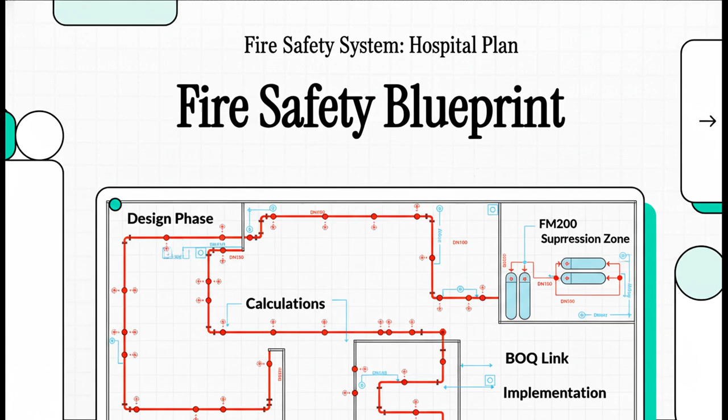All right, let's get into it. Today, we're taking this, a hospital fire safety drawing, a single, really complex document, and we're going to break down exactly how it goes from lines on a page to a real life-saving system. This plan, right here, is our single source of truth, and we're going to follow its journey from concept all the way to reality. So, here's the game plan for today.

First, we'll learn to read the language of the design. Then, we'll translate all those symbols into an actual list of materials. After that, we'll map out how it all gets built, step by step. Then, we'll cover how we make sure it's all done right, and finally, how we prove that the whole thing actually works. Let's get started.

First things first, we've got to understand what we're even looking at. This part is all about reading the drawing, identifying the core systems and the rules that dictate how they all fit together. Okay, so this plan is really showing us three interconnected systems working in harmony. You've got your firefighting system, that's the main network of red water pipes and sprinklers. Then you have fire suppression, which uses a special gas, FM200, to protect really critical areas like server rooms where water would cause a ton of damage.

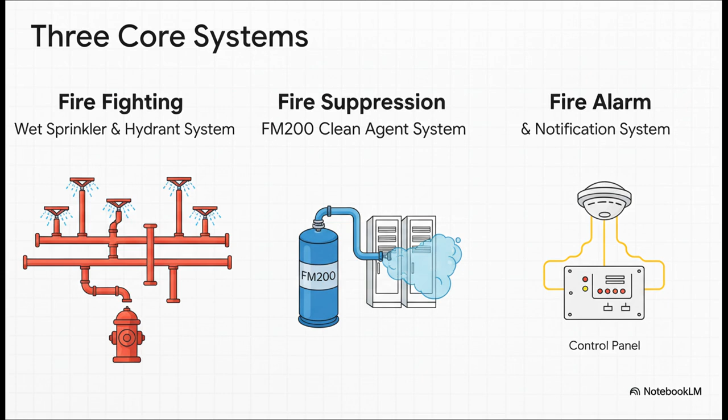And tying it all together is the fire alarm system. Think of it as the brains of the operation, the nervous system that detects a fire and tells everything else what to do. Now, this is absolutely crucial. These codes you see here, they're not just suggestions. These NFPA standards are the official rulebook, recognized worldwide. Things like NFPA 13 for sprinklers or NFPA 72 for alarms. Following these to the letter is what guarantees the system will work when you need it most, and it's what makes it legally compliant.

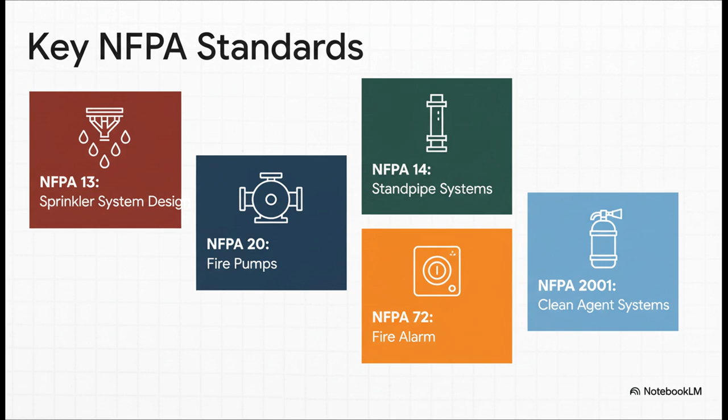So how do we know there's actually enough water with enough pressure to put out a fire? Well, that's where something called hydraulic calculations comes in. It's the core engineering that underpins the entire design. Engineers figure out the worst-case scenario, the area that needs to be covered, the amount of water needed per square foot, and that tells them exactly how big the pipes and how powerful the pumps have to be.

Okay, we understand the theory. We can read the map. Now, we have to turn all those lines and symbols into a real-world shopping list. This next phase is all about bridging that gap from the design on paper to the actual materials, the logistics, and of course, the cost. So how do you even start? It's actually pretty simple. You take it one piece at a time.

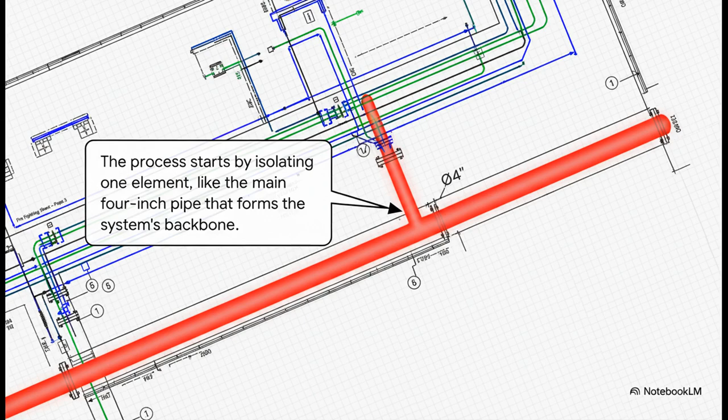Let's look at this main red line right here. The drawing tells us it's a 4-inch diameter pipe. This is a main loop, and it's basically the backbone of the entire sprinkler system. And there it is, the magic of translation. By simply measuring that line on the drawing and applying the correct scale, we figure out that we need somewhere between 120 and 150 meters of that specific 4-inch pipe. A line on paper just became a real quantity.

And then you just rinse and repeat. You do that exact same process for every single pipe on this drawing. From the 3-inch submains to the smaller 2-inch branches, all the way down to the tiny 1-inch pipes that drop down to the individual sprinkler heads. You do this enough and you get your complete piping bill of quantities, or what everyone calls a BOQ.

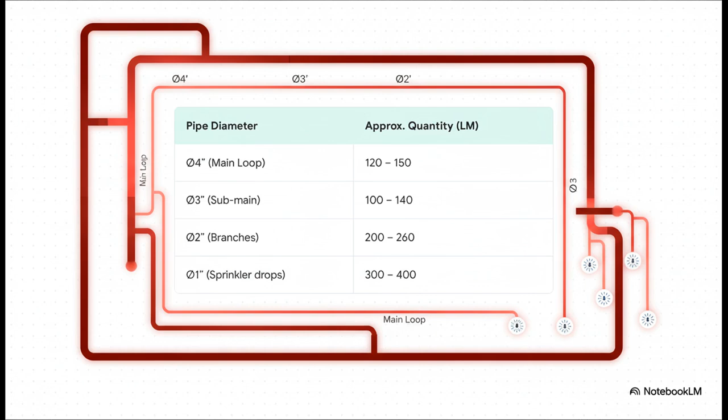Of course, it's not just pipes, right? You do this for literally every single component. The drawing tells us we need around 300 sprinkler heads, maybe 15 hose reels. We also have to count up all the fire alarm parts. We're talking over 200 smoke detectors here, and all the pieces for those 4 specialized FM200 rooms.

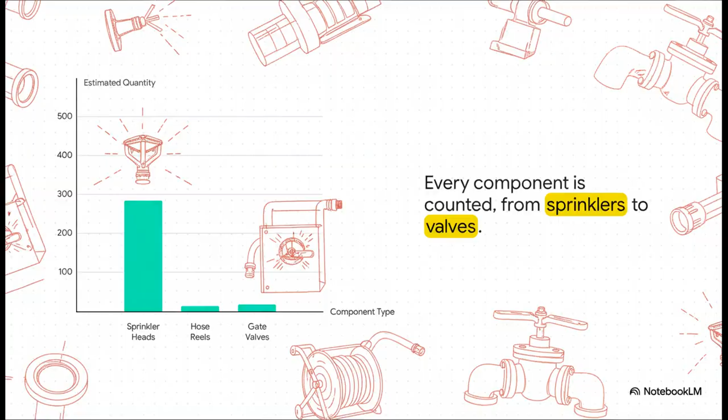Every single nut and bolt gets counted before a single order is placed. So, we know what we're building, and we know how much stuff we need to buy. Now we get to the really practical part, the how-to. What's the right order to actually install everything on site? Because believe me, the sequence matters a lot.

You see, you can't just start anywhere. There's a logic to it. You have to start with the main infrastructure, the big pipes. That's the skeleton of the system. Once that's in, you can start layering in the smaller components, like sprinkler heads, then the fire alarm devices, and you finish with the highly specialized FM200 gas systems.

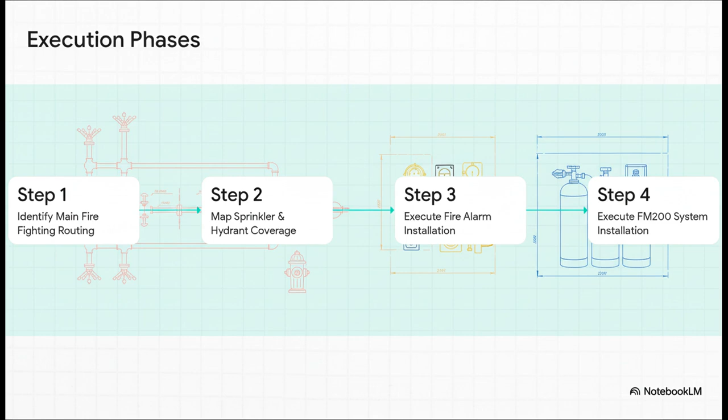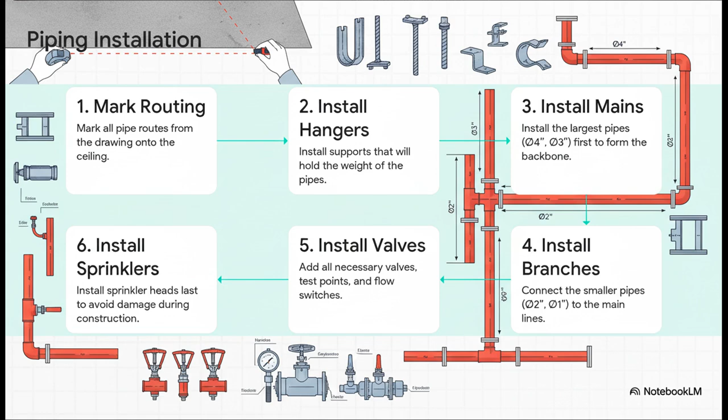Let's zoom in on just the piping for a second. Even that has a very specific order. First, you literally mark the routes from the drawing onto the ceiling. Then you install all the hangers that will hold the weight of the pipes. Only then do you start lifting and connecting the pipes themselves, and you always work from the biggest main pipes down to the smallest sprinkler drops. It's all about building a strong, stable foundation.

Okay, the system is starting to take shape, but is it being built correctly? And are they using the right materials? That's what this next part is all about, sourcing the parts and then checking the work. You know, having a rock-solid procurement plan is so important. You can't just go buy any old smoke detector off the shelf. Every single item, from the pipes to the special fire-rated cables for the alarm system to the FM200 gas cylinders, has to be formally submitted and approved to make sure it meets the project specifications and those all-important NFPA standards.

And this right here shows the constant back and forth between doing the work and checking the work. For every single action the installation team takes, there is a quality check that follows. They install pipes, an inspector comes and verifies the hanger spacing is correct. They finish welding, the system gets filled with water and pressure tested to make sure there are zero leaks. For those FM200 rooms, they even do something called a door fan test to prove the room is perfectly sealed.

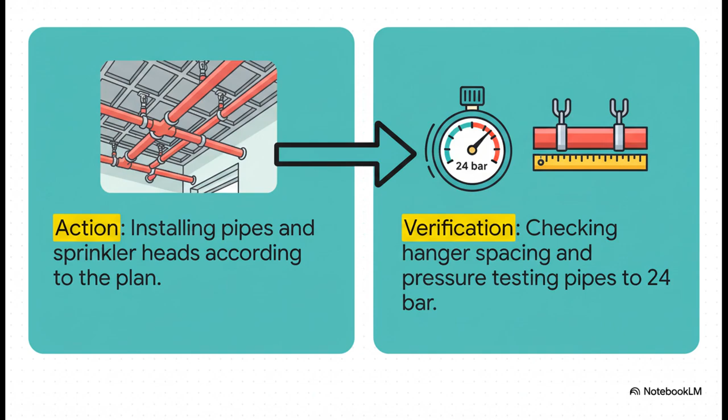We've made it to the final and honestly, the most critical phase. This is where we prove that all these different systems don't just work on their own, but that they work together flawlessly. This is the final exam before we hand the keys over to the client.

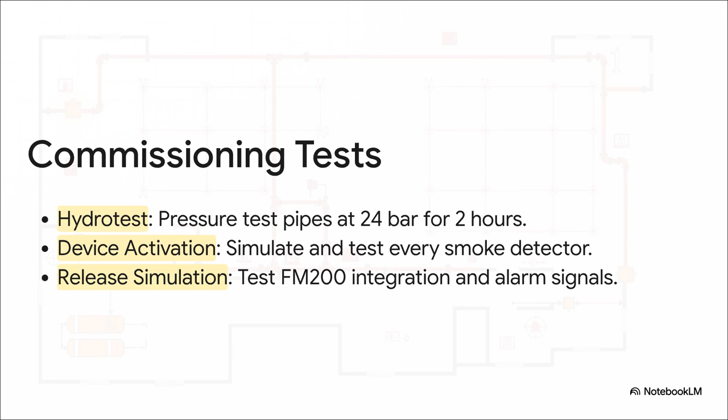Commissioning isn't just one test. It's a whole series of intense trials designed to simulate a real emergency. We'll pressure test the pipes again. We'll go to every single smoke detector and puff smoke at it to make sure it sends a signal. We'll even simulate a full gas discharge in the FM200 rooms to prove the entire cause and effect chain works exactly as it's supposed to.

The day the project is complete is really just day one for the building's safety. The installation is just a moment in time, but keeping people safe, that's a continuous, lifelong commitment. Which brings us to a final thought. Once the system is built, tested, and handed over, the responsibility shifts. It moves from the construction team to the building operators. True safety really begins the day after handover, and it depends entirely on the ongoing maintenance, the regular testing, and the vigilance of the facility team who are now the guardians of this life safety system.